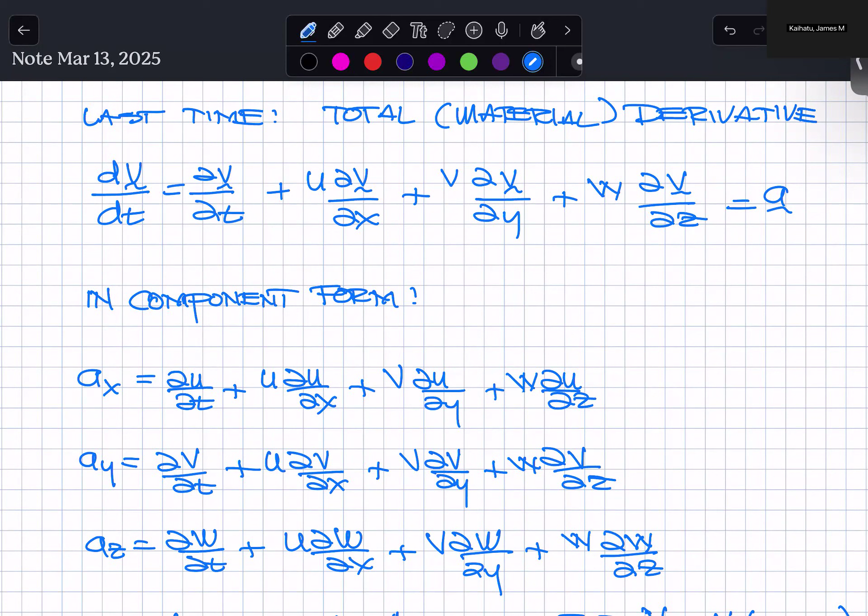Anyway, so what we did last time was look at material derivatives, looking at the change of velocity as a function of time, and if that velocity was also a function of space. So this is the general way that we did it, and then we wrote it out into component forms for the component.

Let's see - x is this way, I guess. Yeah, right, x, y, and then z upward. And then also that would have the components u, v, and w for the velocities lying along those axes. So this would be the component form for the acceleration of a velocity field that was a function of space and time, and it takes into account the translation between those.

So let's take a look at an example and see how we can actually evaluate this and what it actually means for us.

Okay, so let's say we had a hose with a nozzle on it, and fluid is flowing through this hose at 5 feet per second - that's upstream of the nozzle. The nozzle has a length of 2 inches, and downstream of the nozzle, the fluid flies out at 40 feet per second.

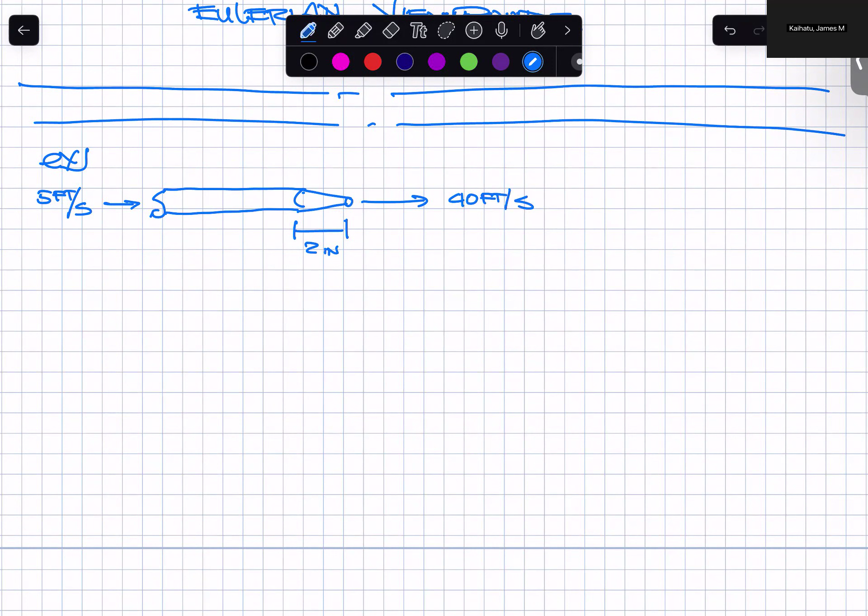Okay, but this is steady flow - steady in the sense that the 5 feet per second has been going into the upstream side of this hose for time immemorial, we don't even know. And 40 feet per second of fluid flow has been jetting out of the outflow of the nozzle along the same time. So there has been no change in time. So what is the acceleration?

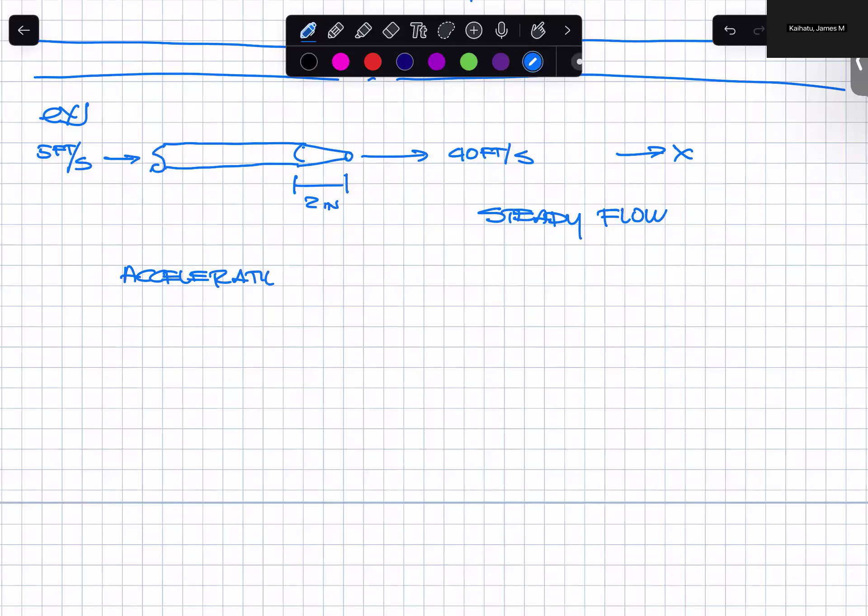Let's say we'll just assume that the only thing that really is evident here is flow in the x direction. So our x component of acceleration looks like du/dt plus u du/dx plus v du/dy plus w du/dz.

Okay, so we want to be able to evaluate that. Well, first of all, it's steady flow, so this term is going to go away. Let me write that a little bit neater. There's no flow in the y or z direction - no flow up and down and no flow in and out of the paper, only flow going from left to right. So those are both zero.

Now you can make the argument, and the argument has been made, that because the nozzle is getting smaller, there has to be some kind of flow going in the vertical direction or in and out of the paper direction. We'll just assume that that's small or negligible. So all we have left is this, right? Now, which velocity do we take?

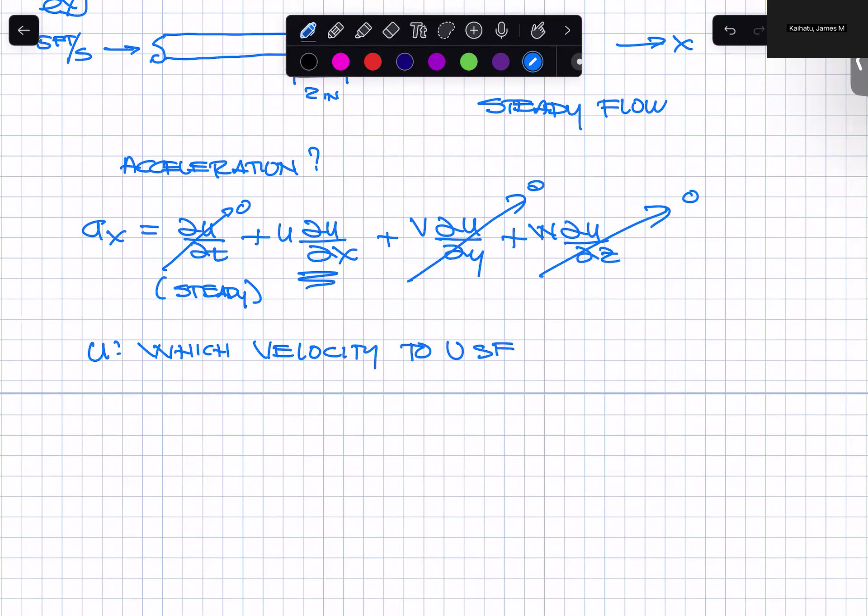Which velocity do we use? We've got two of them here: 5 feet per second and 40 feet per second. So which of these are we going to be able to use here?

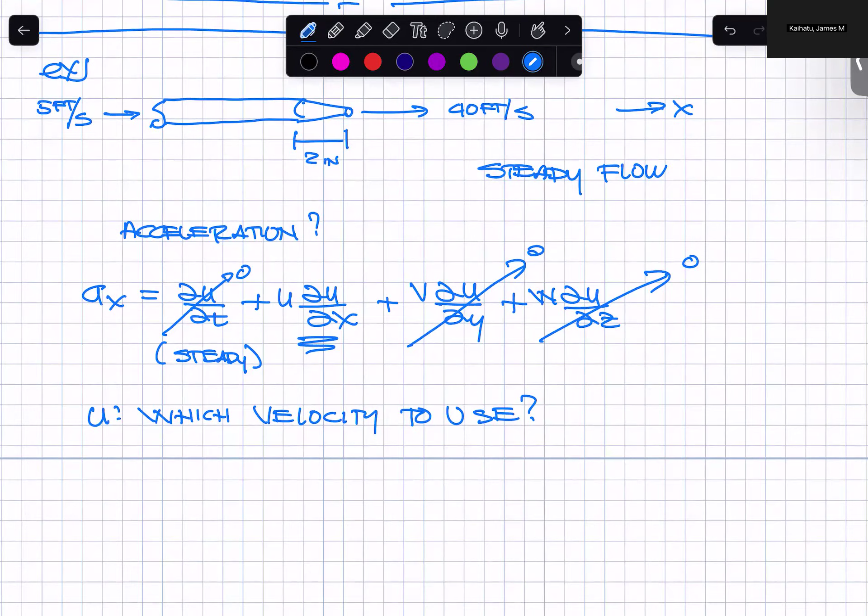Well, what we do is we use an average. So 5 feet per second plus 40 feet per second divided by 2 is equal to 22.5 feet per second. You'll see this used commonly. If you've got two very distinct velocities and you don't know which velocity to use, you might just use an average of the two.

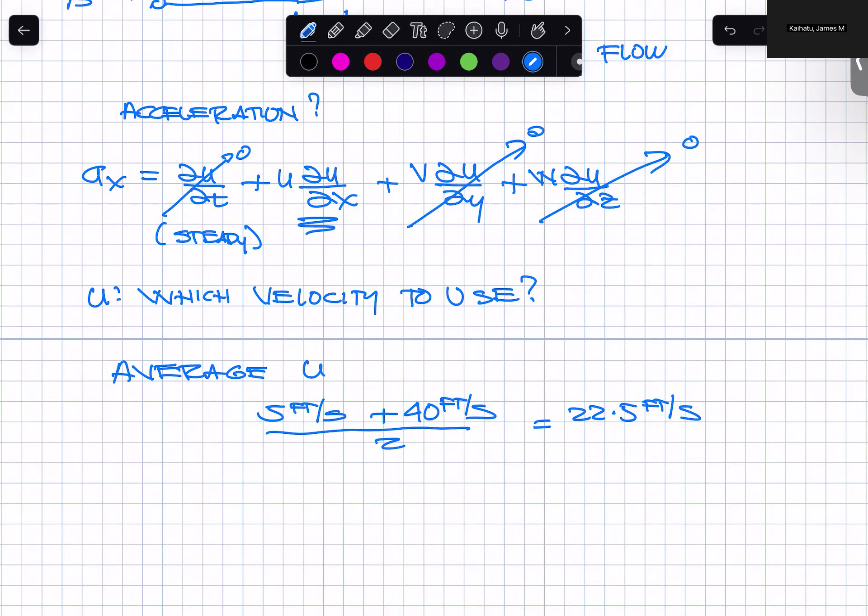And so to calculate this du/dx, we essentially just have the difference in velocities over the distance, dx. The distance here is 2 inches divided by 12 inches per foot, right? So this ends up being 210 over seconds. That's the units.

So a sub x then is u du/dx, which is equal to 22.5 feet per second multiplied by 210 over seconds, and this equals 4,730 feet per second squared. And if you divide through by gravity being 32.2, this is basically 147 Gs.

And that's a lot of acceleration. But anyway, this is an idea of how we can actually get a non-zero value of acceleration for a steady flow case, because the velocity can change as a function of space. And what's forcing that is this nozzle constricting the flow.

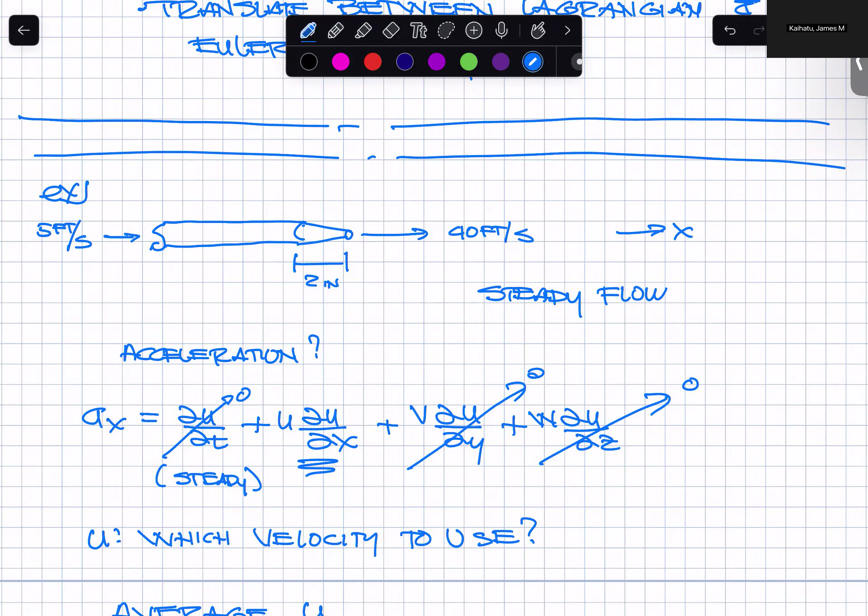Okay, we're going to change gears a little bit here. I'm going to move away from discussions about the Eulerian versus Lagrangian for the moment. In order for us to continue, our goal here is to come up with a way of describing the equations of motion as we know them, F equals ma, Newton's second law, all that kind of stuff, in a format that is useful for fluids.

Again, those laws have been established for particles. Now we need to establish them for fluids using an Eulerian point of view, and so we need to make some changes to what those equations look like.

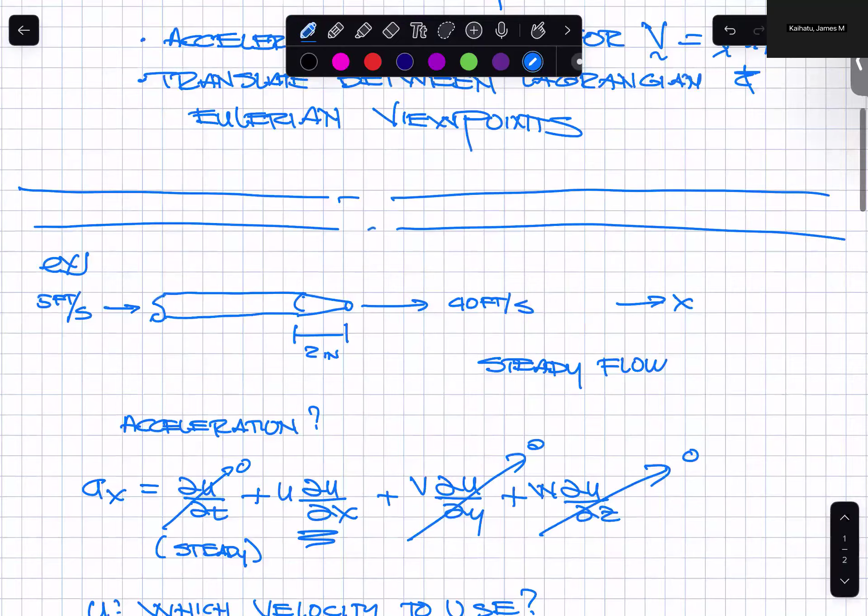So one way of changing those equations is via this convective acceleration. Another way is by translating between control volumes and systems. And so what we have to do here is offer something of a way of translating from a system to a control volume. But first, what we have to do is define all of that.

And I apologize for my voice. The cold seems to have abated, but it's left behind this. My voice kind of sounds like I'm gargling nails, so I apologize for that.

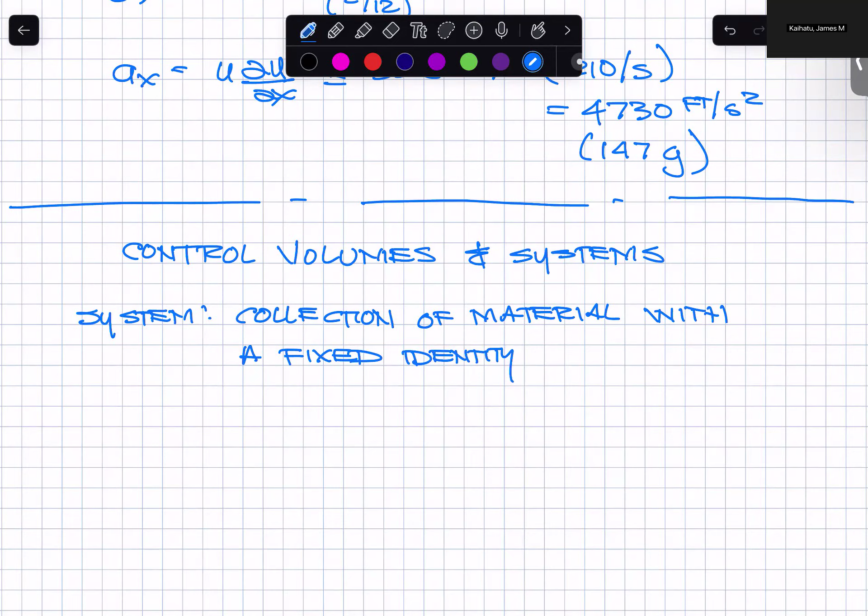So, control volumes and systems. Okay, so a system, by definition, is a collection of material with a fixed identity. Now, with the system, you can apply the laws of physics to a system.

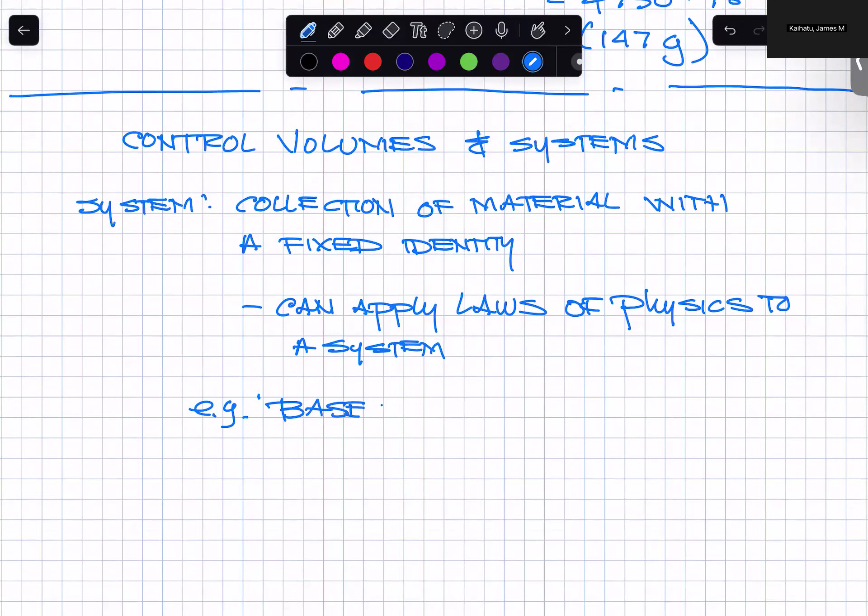So, as an example, we'll talk about my favorite pastime, baseball. Baseball is a really good example of a system, right? It is a collection of material that has a fixed identity. We identify that, despite my sloppy drawing, as a baseball, right? And we know that the baseball has not only a fixed collection of material, it has a boundary. We know what is baseball versus what is not baseball by looking at this. Anything outside that circle is not a baseball. Anything within it is a baseball. All that material has an identified fixed identity.

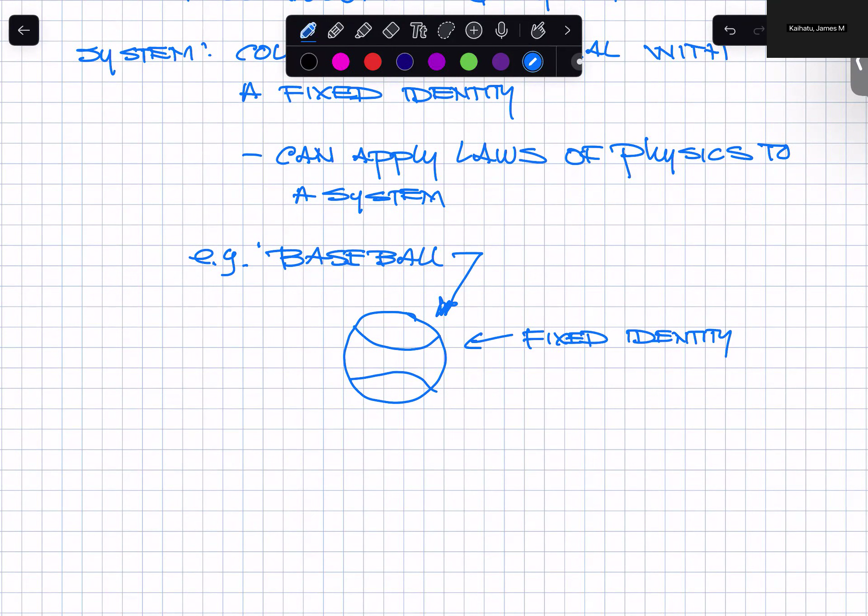So, in this sense, we can apply the laws of physics to a baseball. We know from our physics class what the equations of motion for a baseball flying through the air might be. We know what forces act on it, all of that kind of stuff. So, in this sense, the system - we only know it because we're able to follow the baseball around. We're able to follow systems.

Systems can be easily followed and tracked, and by virtue of that, the laws of physics can be applied to that because we know what the system is composed of. So you can follow the system around, right? Now, this is difficult for fluids.

Because if we wanted to follow a fluid in the same way that we would follow something like a baseball, we would have to look at it at a molecular level. That is, we would have to identify a molecule and follow that molecule around.

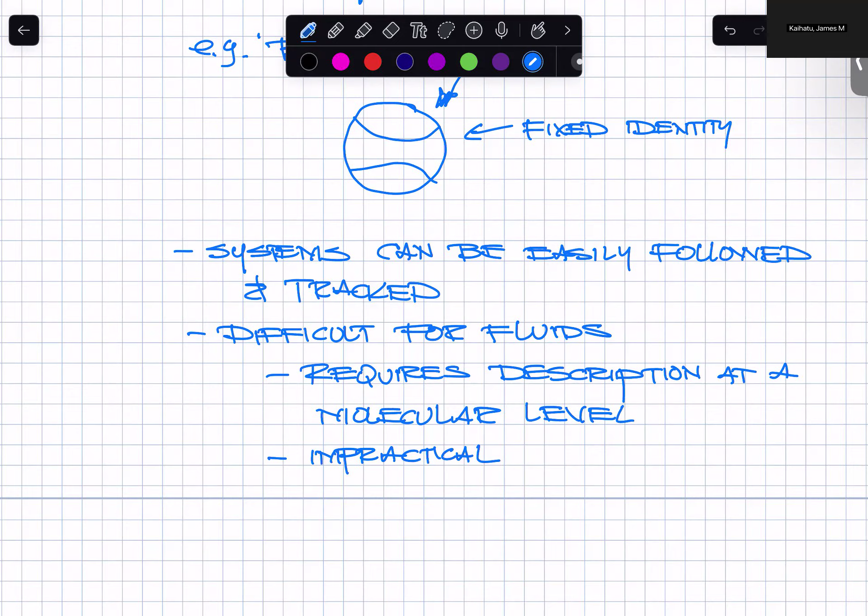So we need to find a different way of describing and manipulating our understanding of the laws of physics that apply to fluids, in a way that keeps us from having to bring it down to a system. So what we want to do is we want to shift

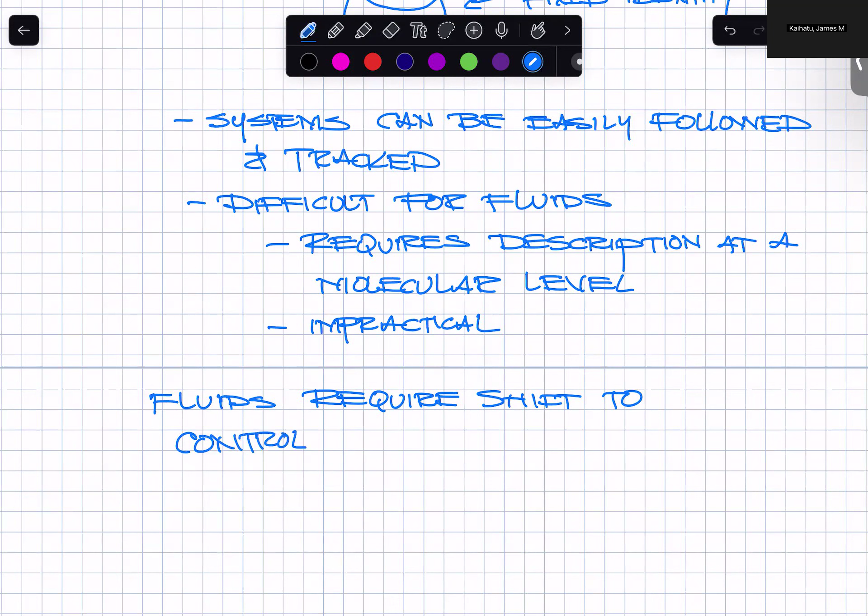to a control volume. So with a control volume, rather than simply following a particle around, you basically have a volume in which you are looking at things going in and looking at things leaving. And then you recast the laws of physics so that it applies to that kind of situation.

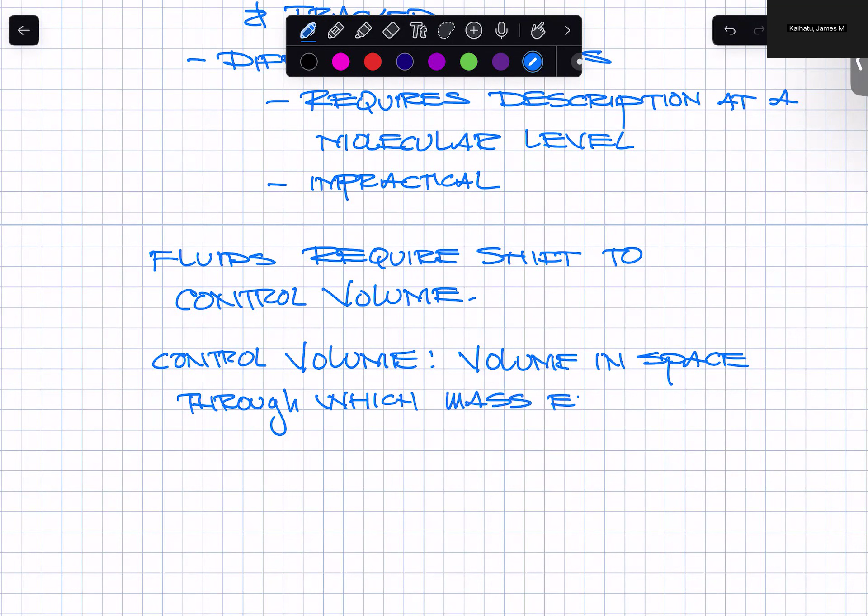So, a control volume by definition is a volume in space through which mass enters, accumulates, and exits.

This is closer to an Eulerian viewpoint. While a control volume can certainly move, if it were stationary, which is how we would typically use it, it is exactly the Eulerian viewpoint. Control volume stays put, things go in, things build up or deplete, things leave, and we just track the comings and goings of the fluid inside the control volume.

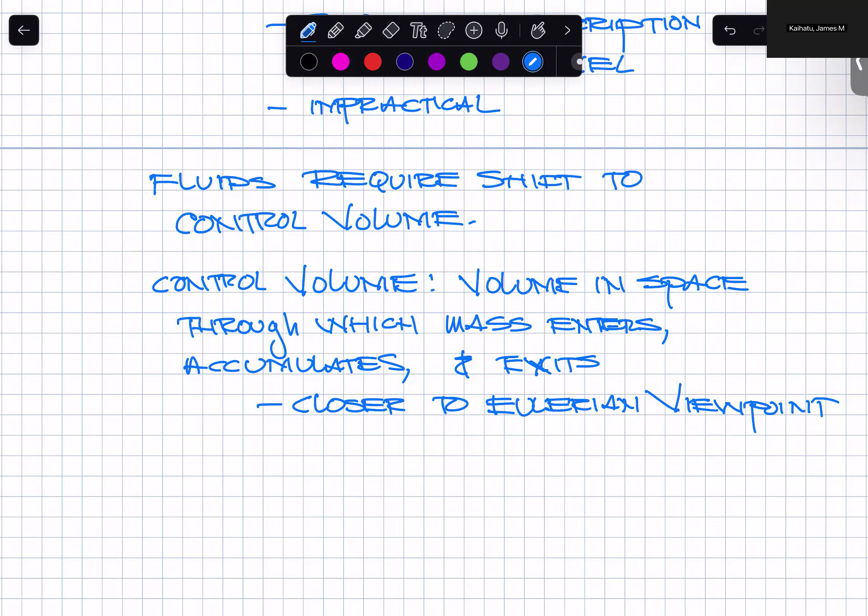But in general, control volumes can do a lot of things. It can be stationary, it can move, and it can deform. So long as you know the speed at which the control volume is moving, or the rate at which the control volume is deforming—that is, the surface of the control volume is either contracting or expanding—we're all good. We can apply everything we're learning here to those types of situations.

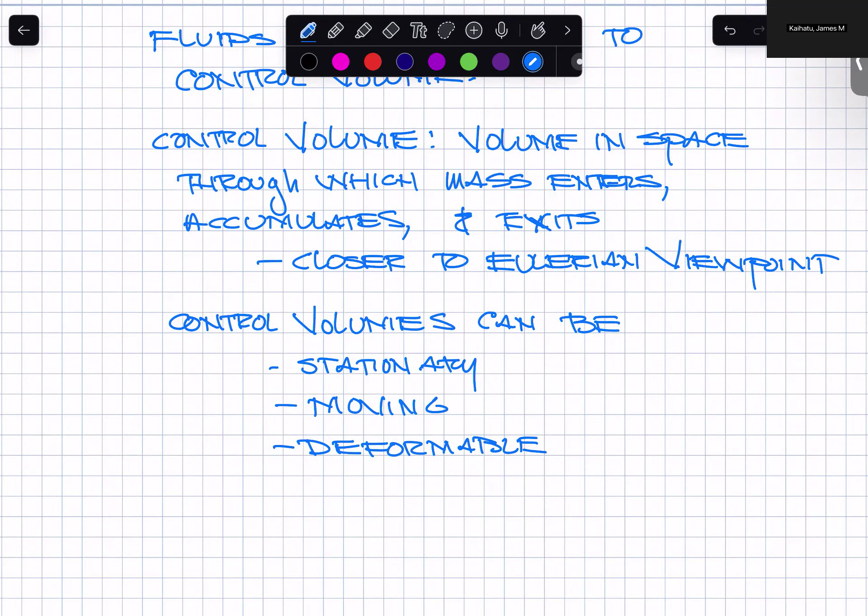So again, to state this: the physical laws that we know, they're written for systems. So we need to translate that to control volumes.

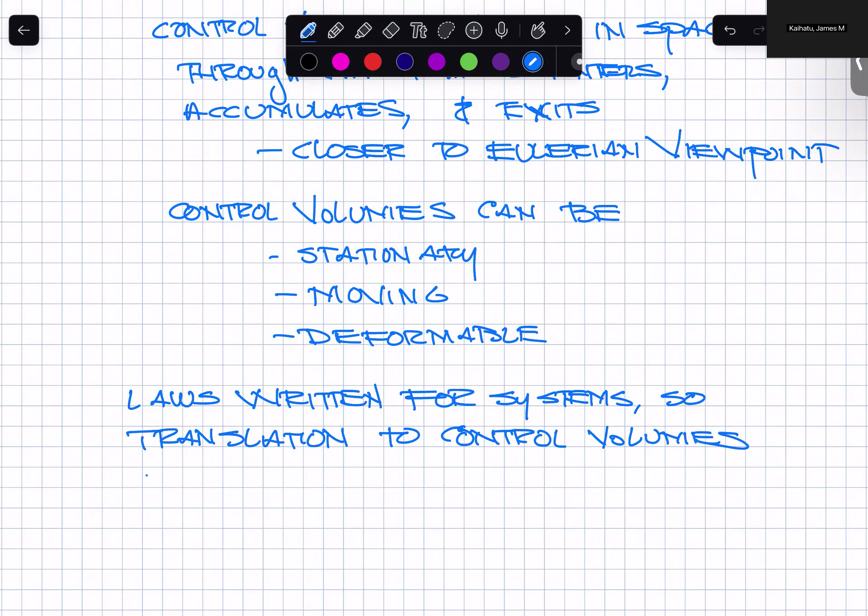And this is done via a device known as the Reynolds Transport Theorem. That's what this thing does. Eventually, at the culmination of chapter 4, we'll run into the Reynolds Transport Theorem, and then we will be able to rewrite Newton's second law, for example, to apply to fluids via the Reynolds Transport Theorem.

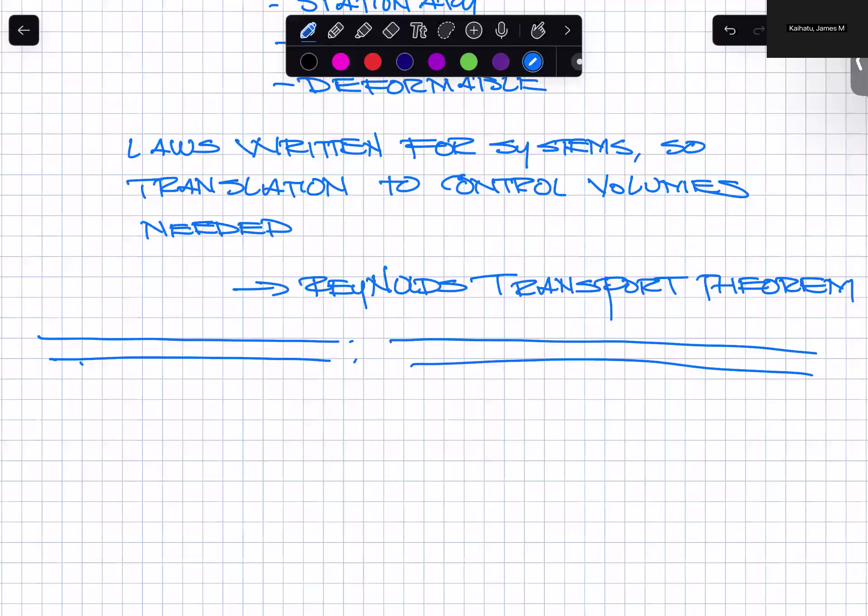So what I'm going to do here—oh yeah, let me move on to that. All right, I took advantage of my spring break prerogative by getting another cup of coffee here. So there's a slight pause.

Okay, so now that I've introduced both systems and control volumes, let's compare and contrast the two and show an example of why a control volume approach is far easier for fluids. Right, so let's say...

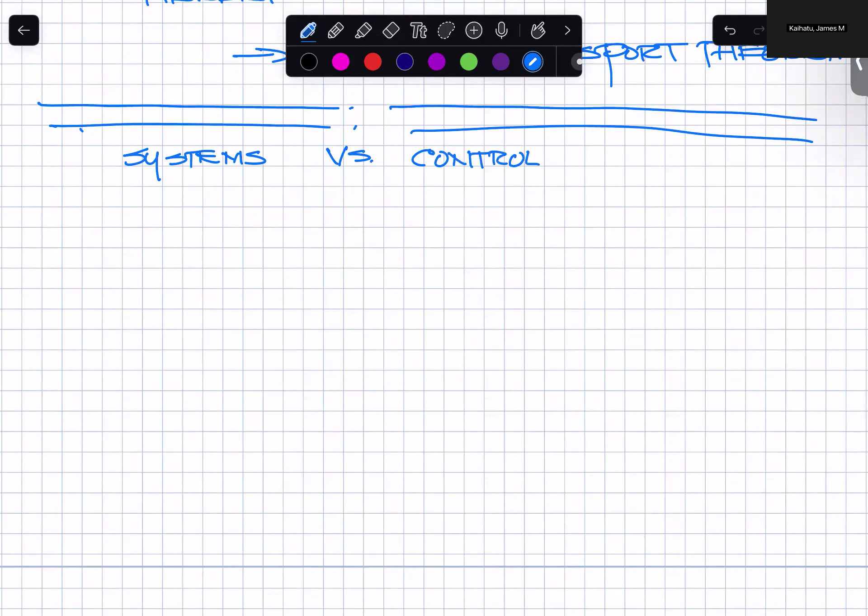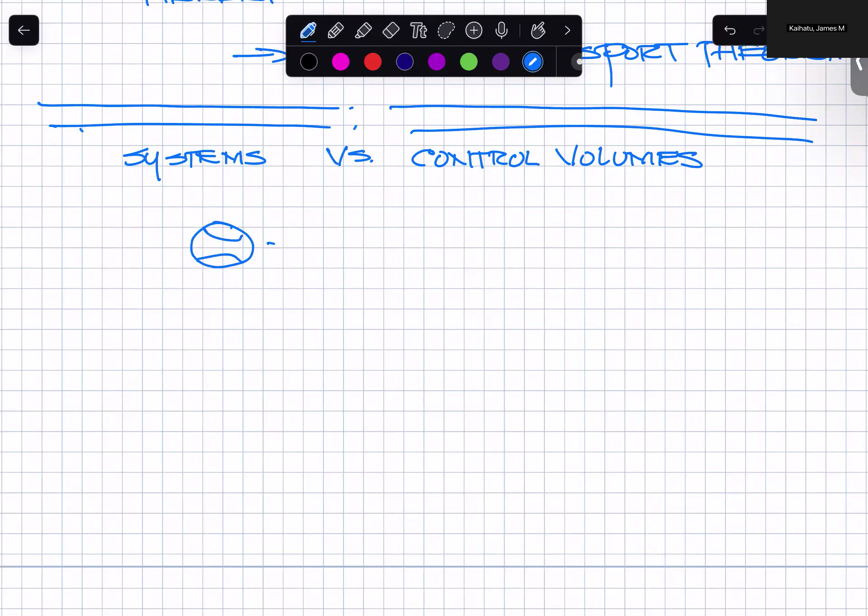Okay, so first let's take a look at a system approach, and we'll show an example here. Let's say, again, you've got a baseball and you are basically throwing it at somebody, and unfortunately that somebody didn't catch it. And so then it bounces off that somebody, and that person ends up doing something unfortunate, like collapsing, that kind of thing.

This is really well suited for our physical laws because we have a system here that has velocity, has momentum, and then when it encounters this person, it has a change of momentum, which we can describe. There's an impact. We can describe that as well. So everything's describable via our physical laws.

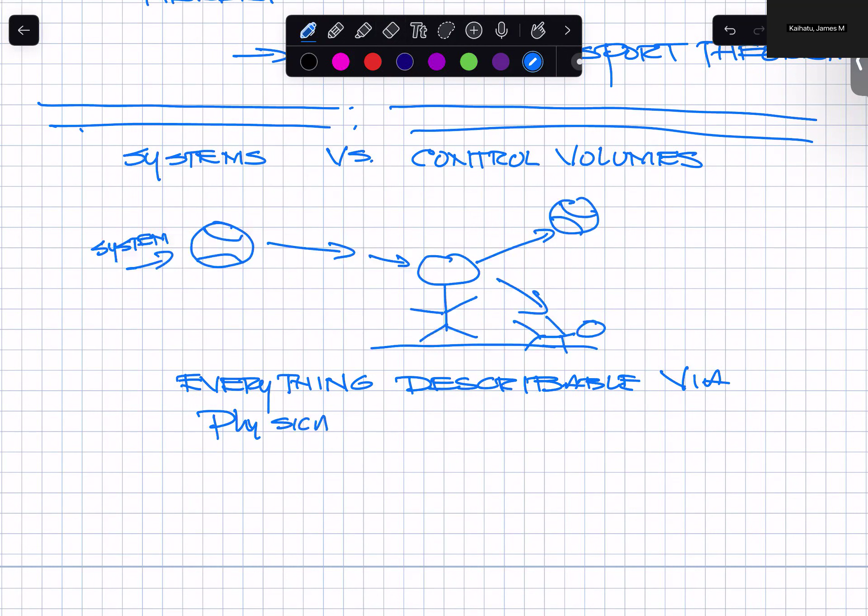And the system is always well defined. The system is the baseball. The impact is a change in momentum that happens to that system, and so on. And we can describe all of that.

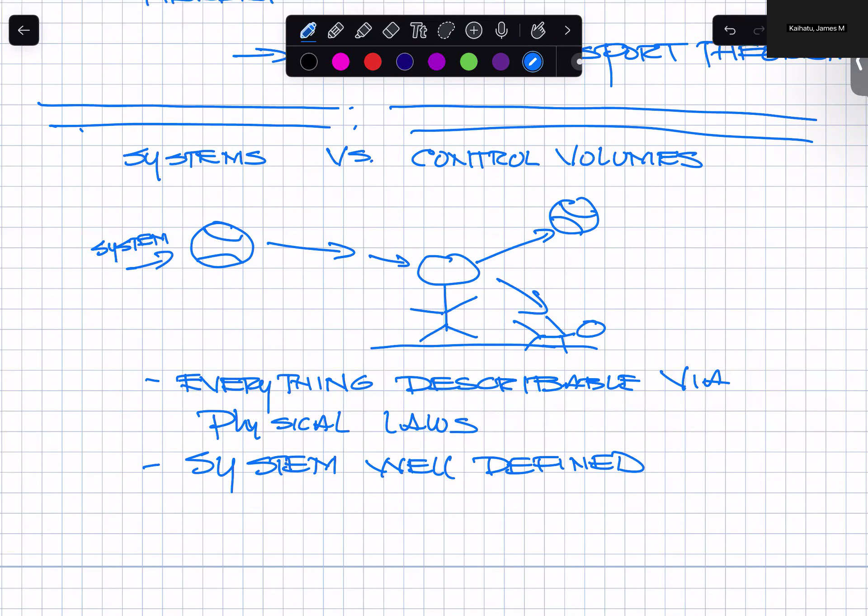Now let's take another example, which would also be a systems approach. But this time, rather than a baseball, we use a water balloon. Okay, so now we've got this water balloon—you'll have to take my word that this is a water balloon.

This is a system. It's identifiable. You create a water balloon, you tie off the knot. It is a system—an easily identifiable collection of material with a fixed identity. It has a water balloon, and it goes through space as a water balloon, deforming a little bit just due to interaction with the air, and then it finds its target.

And there is an explosion, of course, right? So the water balloon ends up exploding on this person. And there's a law that describes this impact, maybe F equals ma or something like that. But the thing that's different now is that the collective identity of the system is now dispersed, because now you've got water particles all over the place—water here, water there, water there, water there, water there. And each of these has a law associated with it.

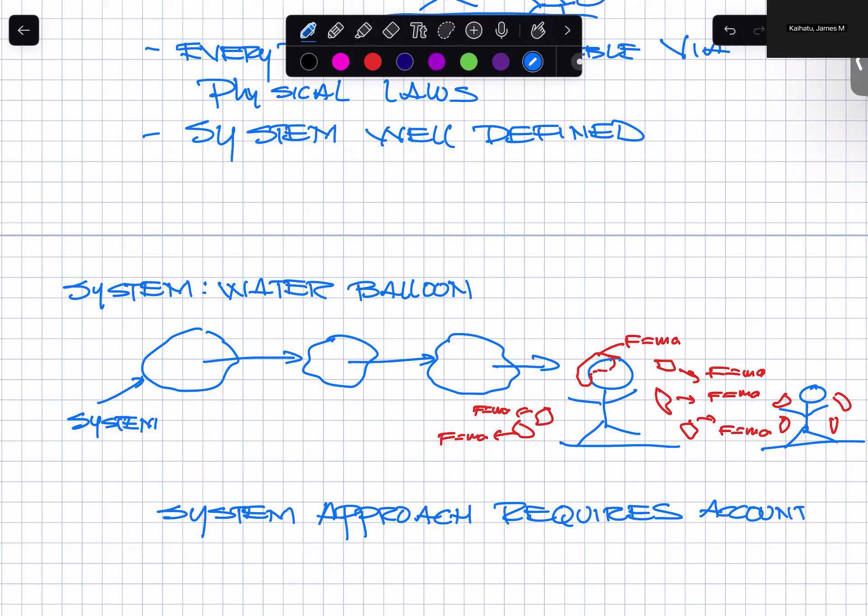So if you're missing any water, if you're not accounting for it, it's lost due to some explosion - it hits that person, it explodes, there's water all over the place. Technically, you can't get an accurate read of the force that person was hit with unless you account for every drop of water that was originally in that water balloon. So clearly, this is not a very tenable way to treat fluid flow problems, right?

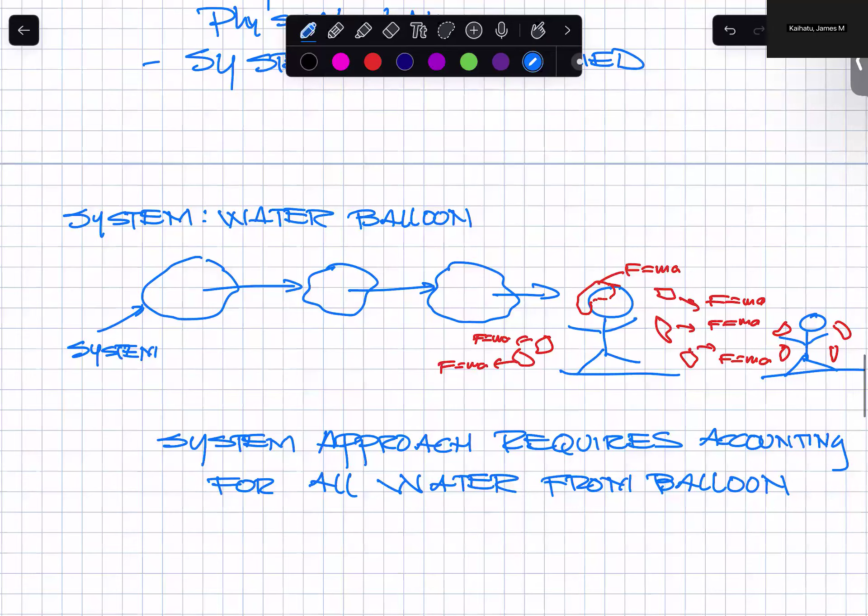So instead of doing that, we can do a control volume. Let me put a point on this. Okay, so then what we'll do instead is try a control volume approach.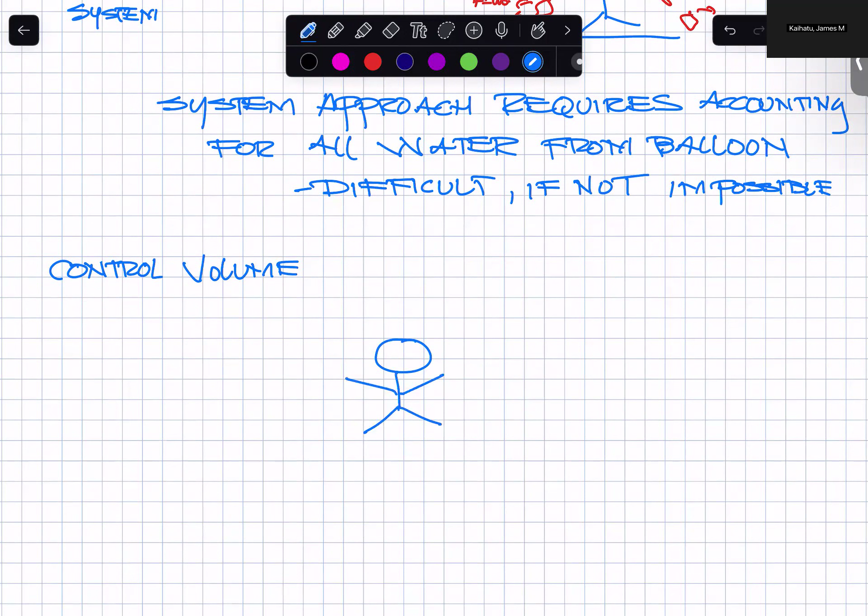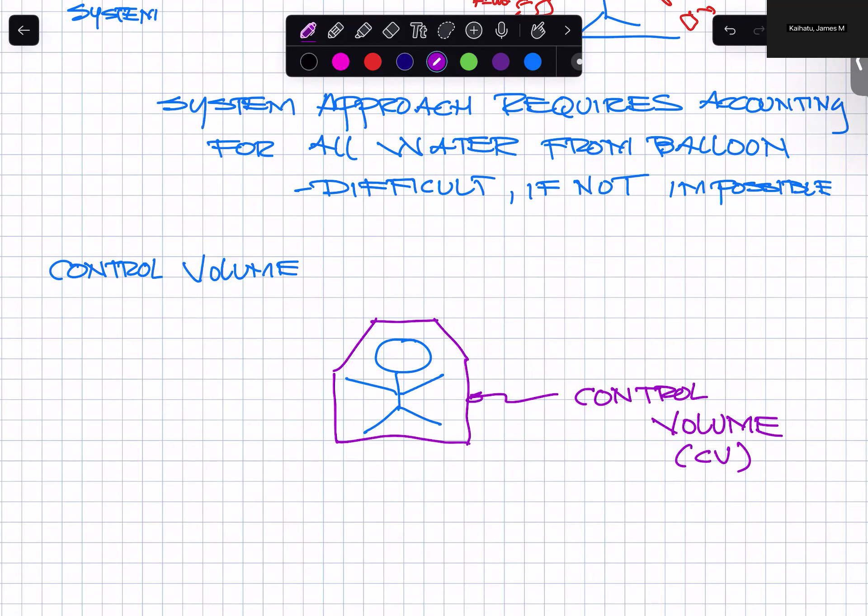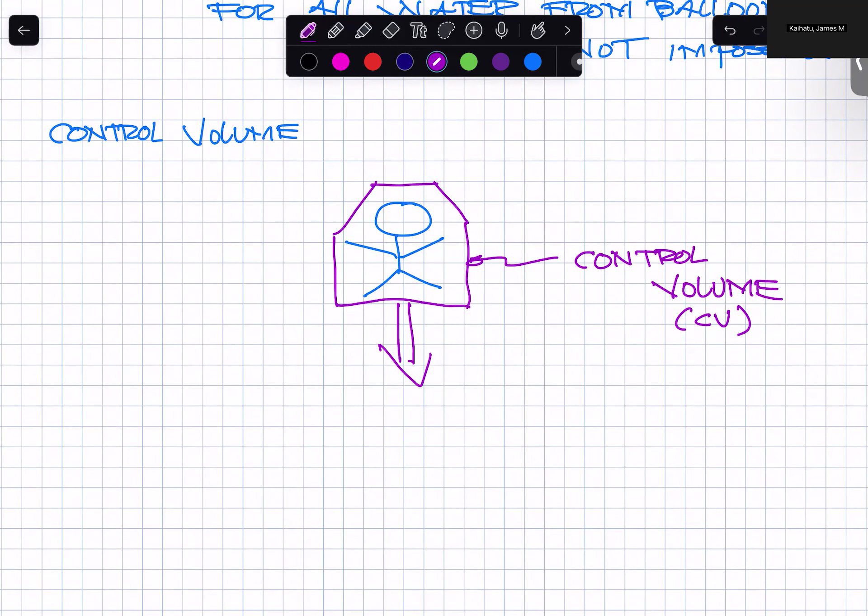So this time we'll take our unfortunate target right here and we'll enclose them with a control volume. So sometimes we shorten this to read CV. What happens then is we can remove this person and basically translate this, convert it from something where you're actually looking at every nook and cranny of your target and trying to figure out where the water went, to simply having a simplified volume in which you're just tracking what's going in, what's accumulating, and what's leaving. Something like that. So here's your control volume.

Now, when you're looking at things coming in, like the water balloon, you're only worried about things leaving and coming into this volume, or whatever. So basically, you're only tracking what's coming in, what's accumulating or depleting inside the control volume, and what's leaving the control volume.

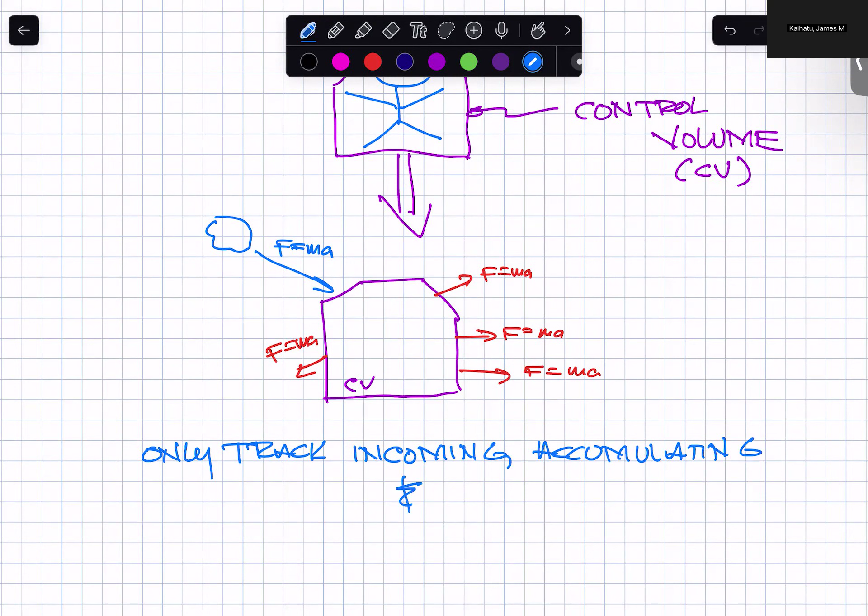And the nice thing about that is once you deal with the material that's entering through the control surface into the control volume, accumulating inside of it and then exiting it, you don't care about it anymore, right? So you don't necessarily have to worry that it might be, in this case, splashing someone else with that same water, and now that water needs to be tracked. You don't have to care about that anymore. You're only worried about what's happening through the boundaries of the control volume and inside the boundaries of the control volume.

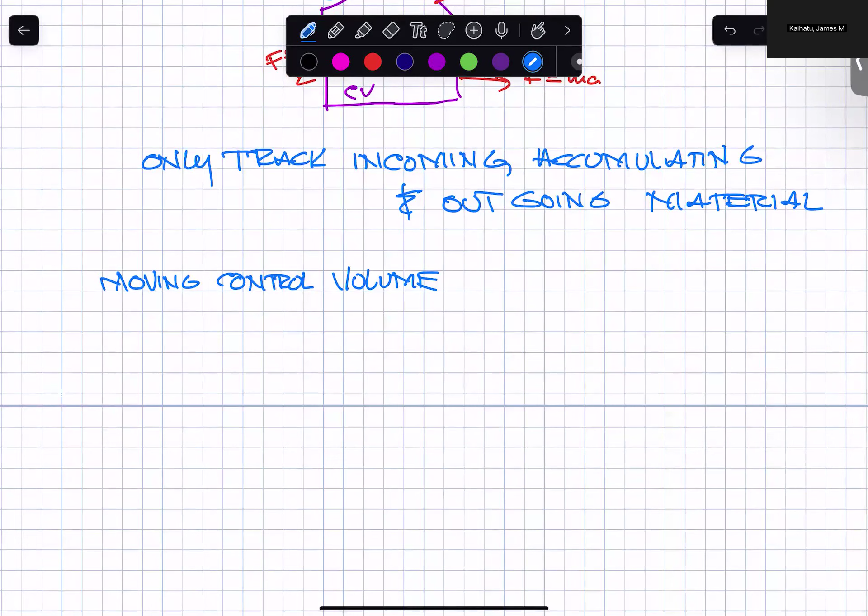Okay, so I mentioned that there's also the possibility of having a moving control volume. That is also possible. In this case, let me move this down here. So in this case, our poor unfortunate target sees what's going on and starts to run. But you can still enclose that person in a control volume.

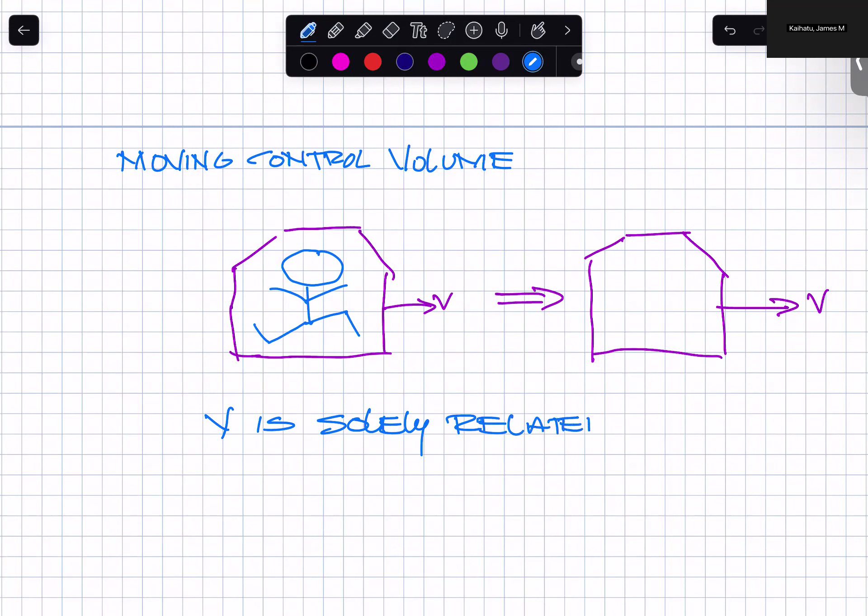This time the control volume is moving with a velocity v to track the speed of your target. So this can now be converted into something that looks like that, same control volume shape, but it's moving at a velocity v this time. Note that that velocity is not necessarily related to the velocity of the material going in or leaving the control volume. That's a separate thing - this is just the velocity solely associated with the control volume, again not related to velocity of material entering and exiting the control volume.

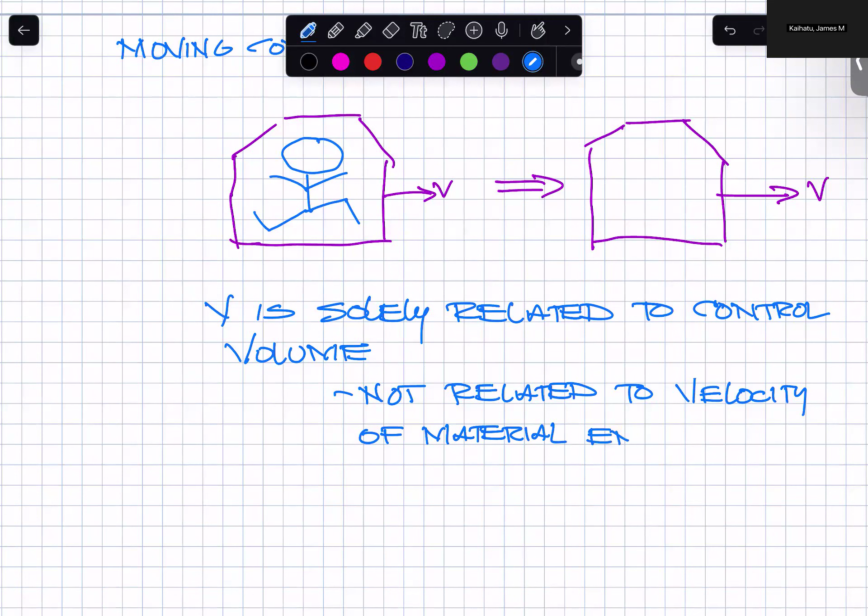So now the control volume deforms around this person who's now adopting more of a defensive posture rather than running away, right? But we still have to account for things. What do we have to account for this time? This time we need to account for the overall change in the surface area and the volume of the control volume.

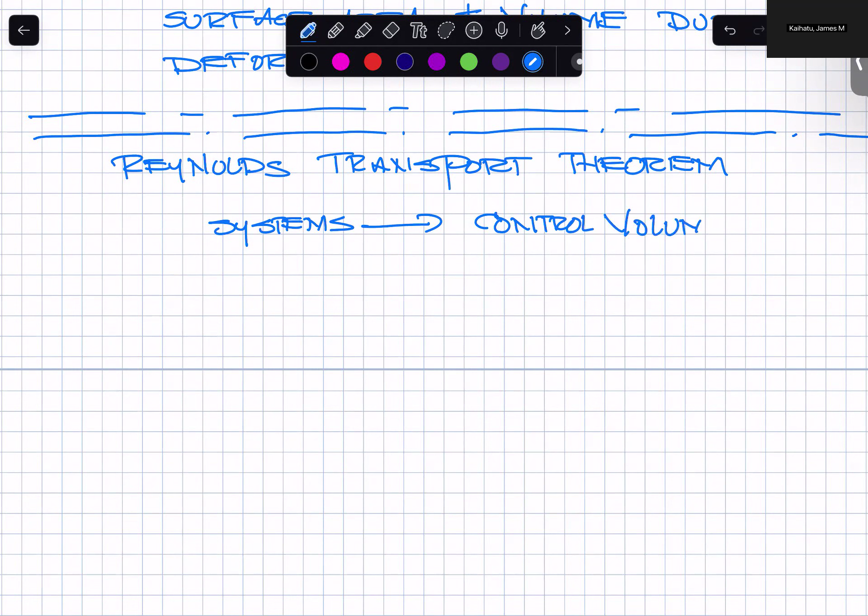Basically, it's a useful tool to translate from a systems approach to a control volume approach. So in order for us to do that, we have to define a few things.

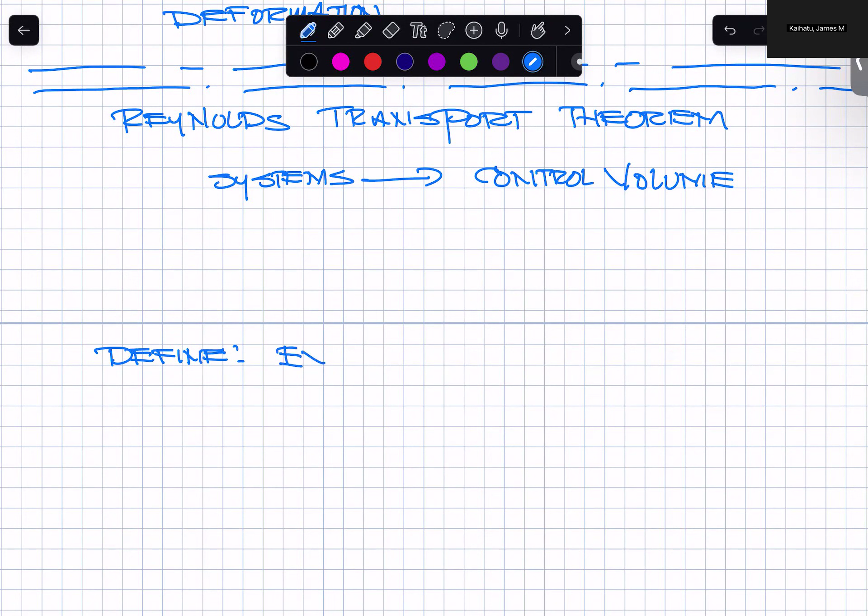We have to define the difference between an extensive property and an intensive property. So what is an extensive property? It has to do with describing the material entering and exiting the control volume, right? That is the fluid or the momentum or whatever. So an extensive property is dependent on the amount of mass.

One example is kinetic energy, because if you take a look at the expression for kinetic energy, it's essentially 1/2 mv squared. So you see m right here. So the amount of kinetic energy of something depends on its mass. Momentum is another one, because it's essentially the mass times the velocity. Weight, of course, is another - mass times the acceleration due to gravity. And also mass itself is dependent on mass, etc. So these are extensive properties.

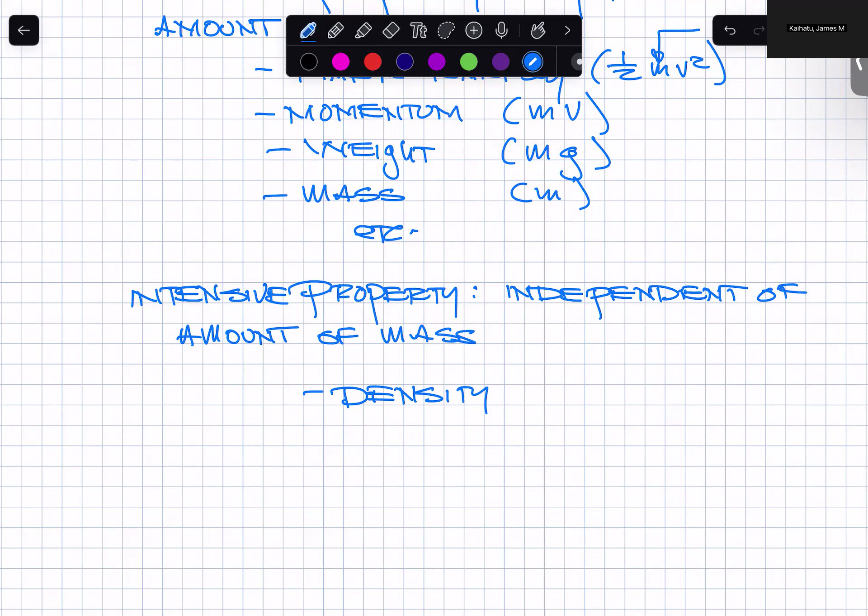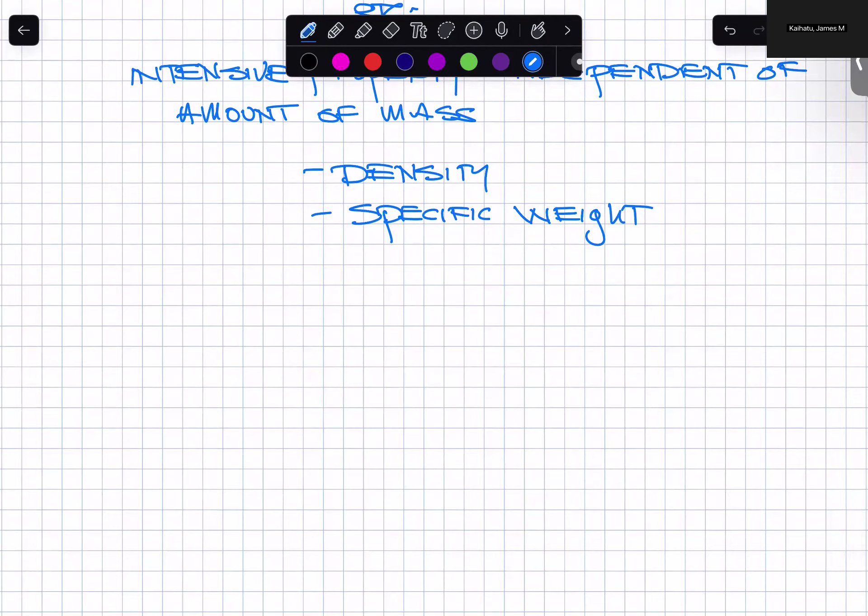Intensive properties, on the other hand, are independent of the amount of mass. So what are some examples of that? Density is a good example, because it's mass per unit volume, right? Another one is specific weight. They're also independent of the amount of mass. So it's per something. So as an example, the idea being that if you could divide out the mass, then what's left is the intensive property.

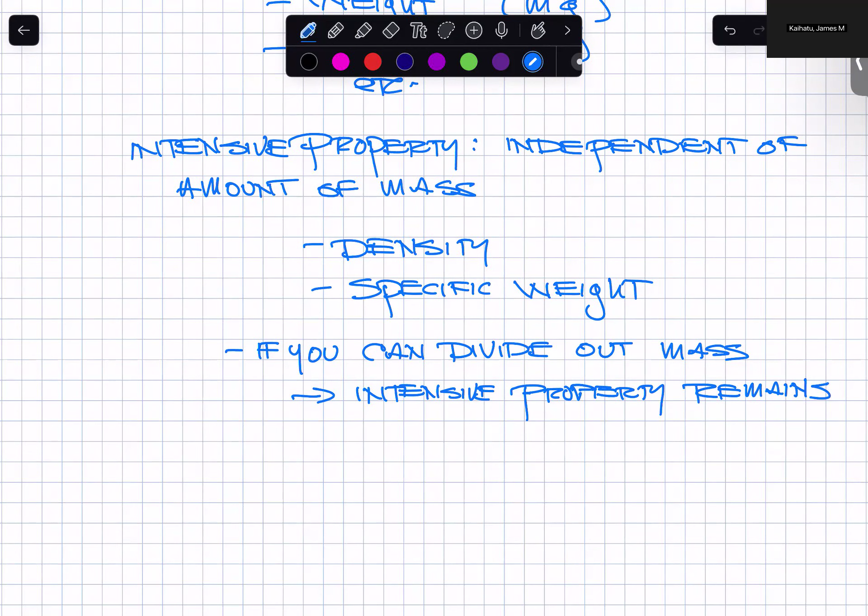Essentially, in general form, we can write something like this, where this capital B is some extensive property, and you divide out mass, and what's left is the intensive property. We'll use capital B and lowercase b to distinguish between extensive and intensive properties.

So if we wanted to take a look at the amount of extensive properties of a system, we can write it like this: something that's integrated over the system, the mass density multiplied by that intensive property multiplied by the volume, right? So density times volume is mass, and so that multiplied by the intensive property is the extensive property. And this is then integrated over a system.

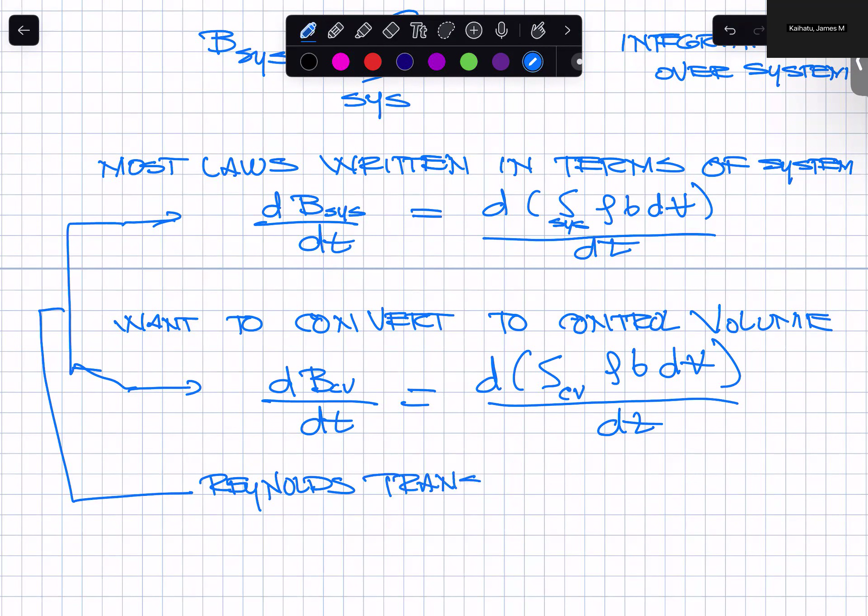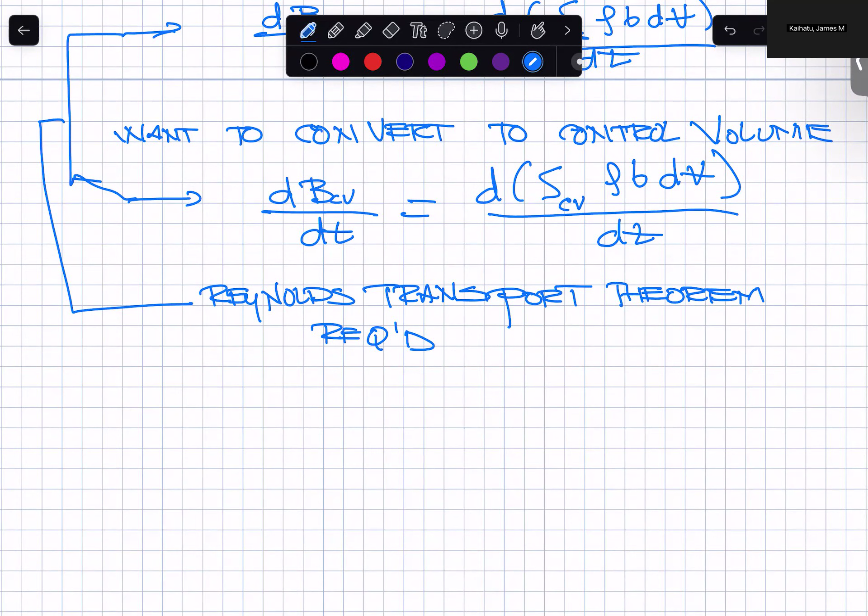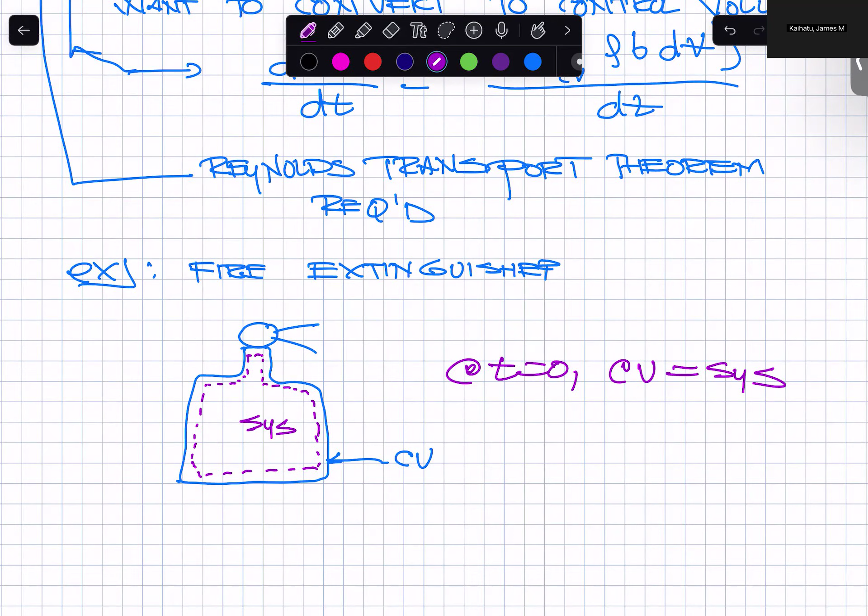Nothing's happening, right? So now at this point, it's time to fight the fire, and now you open the valve. Now you still have a certain amount of system inside the control volume, but now all this stuff is coming out, and all this can be also comprising the system. So that's your system - this is also part of the system - but the control volume is still the same. So the thing is that within the context of the system, the mass of the system is unchanged. Whether you are keeping that foam within the original bottle or tank, or opening the valve to put out the fire, the amount of system, which is the mass of the system, the mass of the foam, remains unchanged.

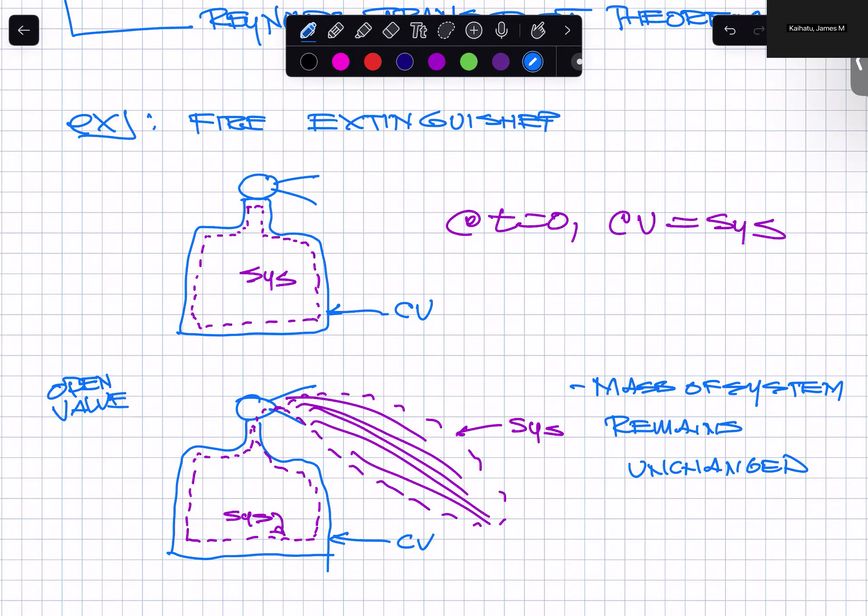So the mass of the system remains unchanged because as long as we're able to track where the foam goes, we can account for it all. Thing is, though, now we no longer have this equivalence between what's going on in the system and what's going on in the control volume, because now the mass inside the control volume is reduced. That changes.

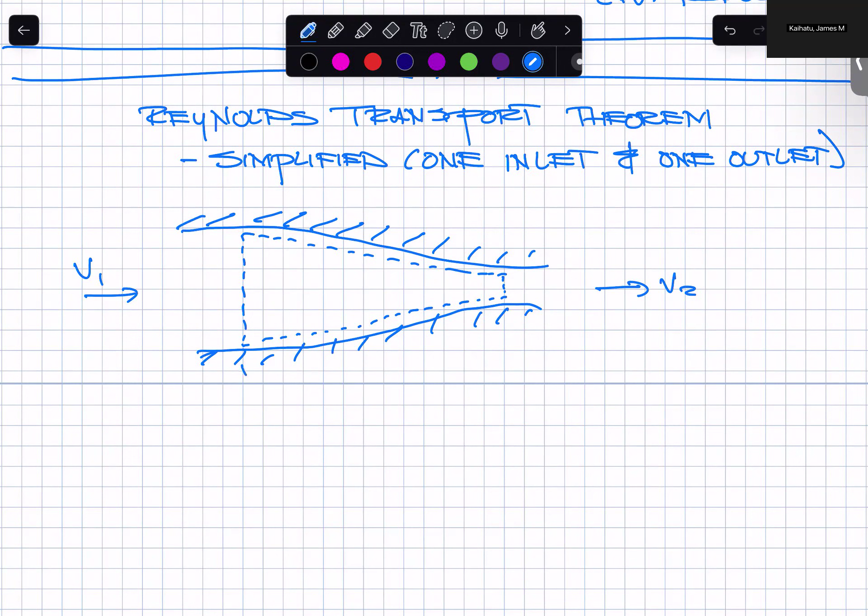So fluid has been flowing through this cavity for forever, coming out through here at V2 and going in here at V1, and there's this boundary here. The inflow we'll call 1 and the outflow we'll call 2. And this we'll call time t.

Some arbitrary time. This is a situation. Now the control volume is the pipe or the domain between 1 and 2. We'll call this a pipe. So it's a pipe between...

Remember that a control volume is stationary and we're only looking at things going in and out. So it makes sense for the control volume here to be the pipe, the thing that contains whatever we're looking at. And what we're looking at is the system. The system, on the other hand, is the fluid that occupies the control volume at time t. So the control volume is in the solid line and the system is in the dashed line.

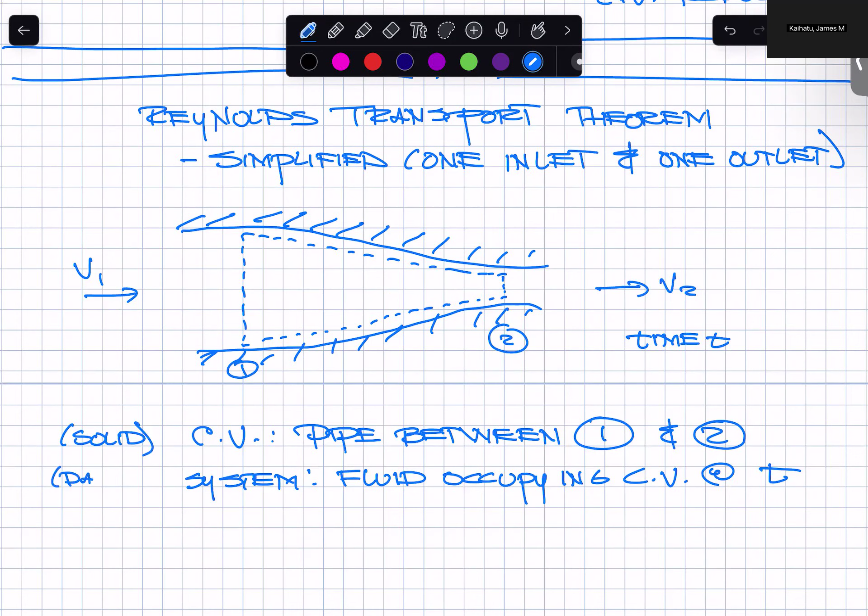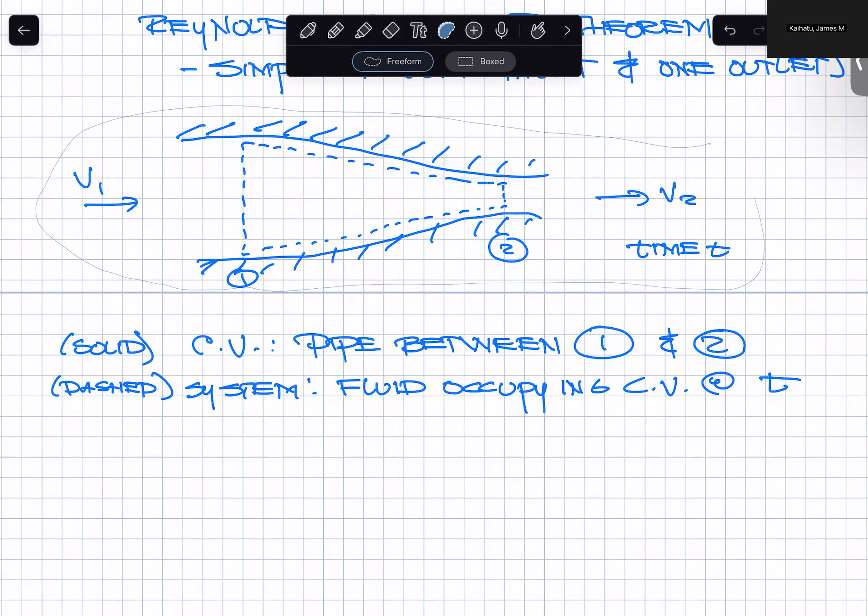Okay, now I'm going to do something a little bit mean. I'm going to take this, go ahead and copy this, and move it down over here.

Okay, so now we're looking at a situation where at time t plus delta t, there's been some change in time. We've moved forward. The control volume stays the same, but the system has moved. The fluid moves. So in this case, what is the system now? The system is still the same collection of material that was there at time t. It's just that now that whole system of material has moved from left to right.

So I'm going to draw in purple what the system now looks like at time t plus delta t. Let me do this first, a blue, and then a purple.

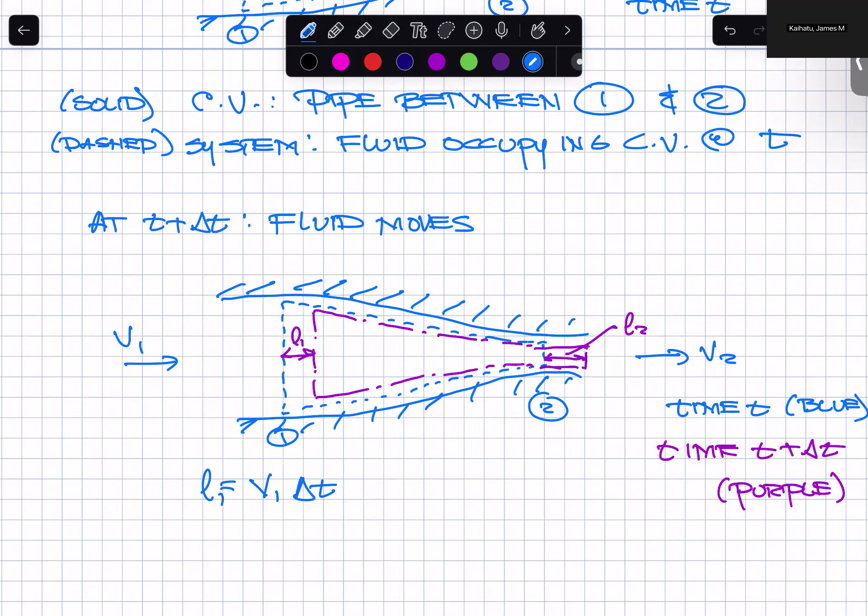So L1, the distance, is equal to the velocity V1 multiplied by delta t. It is the distance is the velocity multiplied by the increment of time. So that distance here, L1, is equal to V1 times delta t. And conversely, L2 is equal to V2 times delta t.

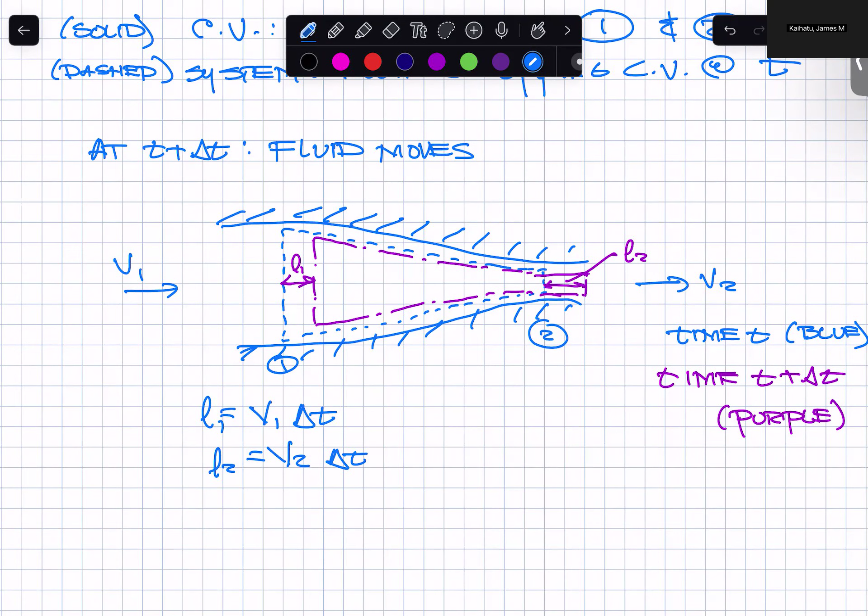So what we're going to do is take this, the collection of dashed lines, and get it out of the pipe for now. So there would be the system at t, and then we'll go ahead and draw the system at t plus delta t.

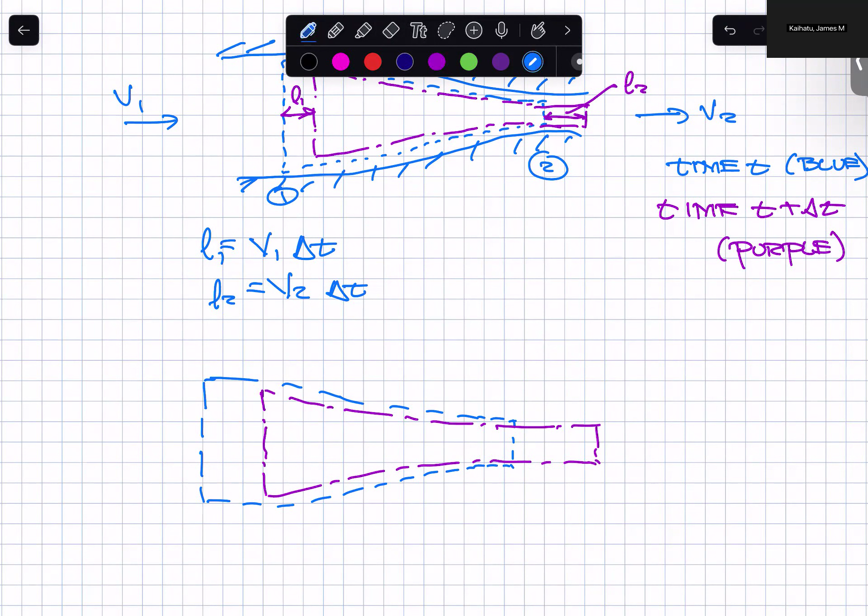So that's kind of what we've got. We've got this distance of L1, and we've got this distance L2. So this is originally point 1, and that's originally point 2, denoting the upstream and downstream ends of the control volume. Those stay the same. So what we've got is a couple of three different regions that we can identify.

We'll call this region here 1. We'll call this region here 2. And we'll call the region that remains the control volume minus 1. That is the region that was originally the control volume. Then over the course of delta t, it lost region 1.

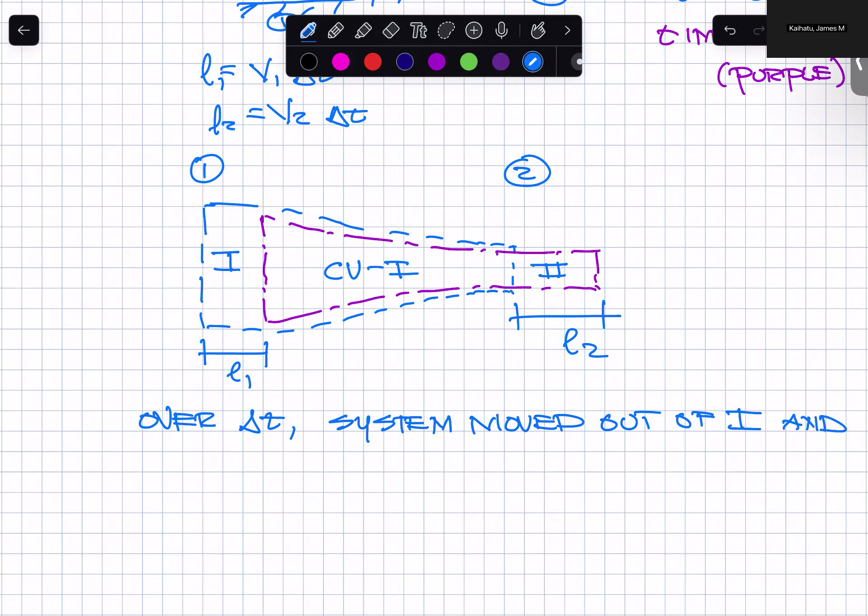Over delta t, the system moved out of 1 and into 2. So at t, the system is equal to the control volume. At t plus delta t, the system is equal to the control volume minus region 1 and plus region 2. That's the stuff that's in purple.

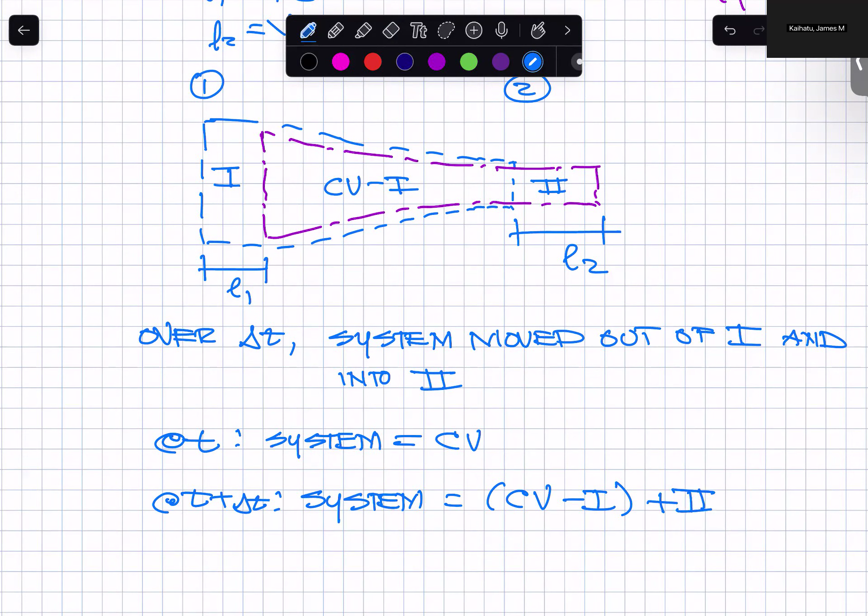So what we want to do here is track the extensive property, capital B, of the system.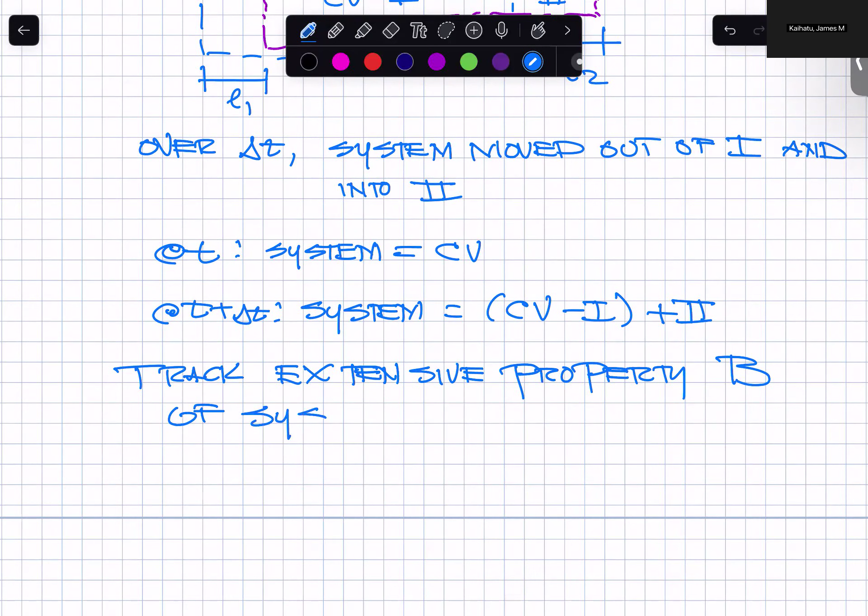So doing that, it means that B, the property, B of the system, the amount of B in the system, is equal to the amount of B in the control volume at time T. And at T plus delta T, it changes: the amount of B in the system at T plus delta T is equal to B of the control volume at T plus delta T, minus the amount of B in region 1 at T plus delta T, plus the amount of B in region 2 at T plus delta T.

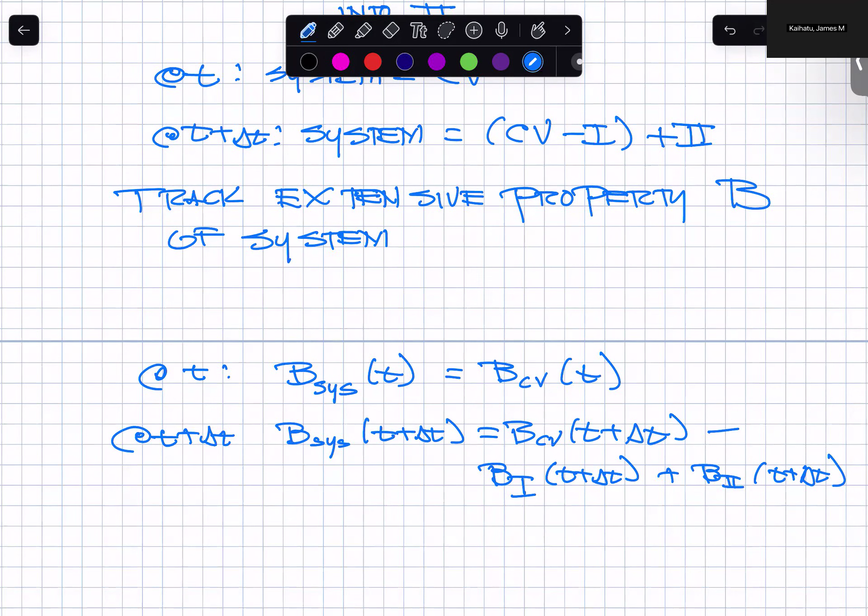And so what we want to do is take a look at the change in the system, of the B of the system over time.

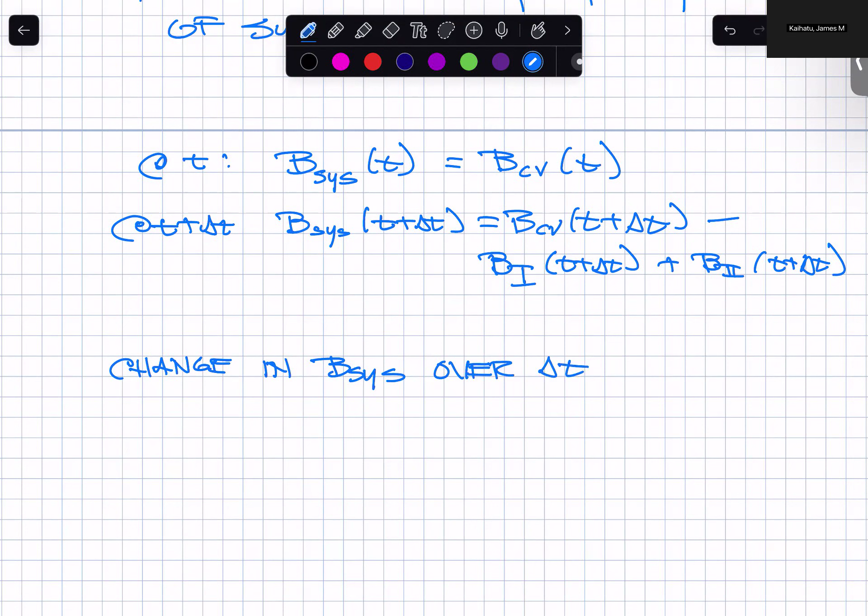So that would be delta B system over delta T, which is going to be equal to B of the system at T plus delta T, minus B of the system at T, divided by delta T. Which equals, substituting in what we have, B of the control volume at T plus delta T, minus B in region 1 at T plus delta T, plus B in region 2 at T plus delta T, minus B of the system at point T, over delta T.

So basically what we did is we took this and converted it to something that relates to a control volume. But also, this B system at T, remember that at point T, when nothing's happened yet, or we're just starting our observation, the system is equal to the control volume. So this is actually equal to B in the control volume at time T.

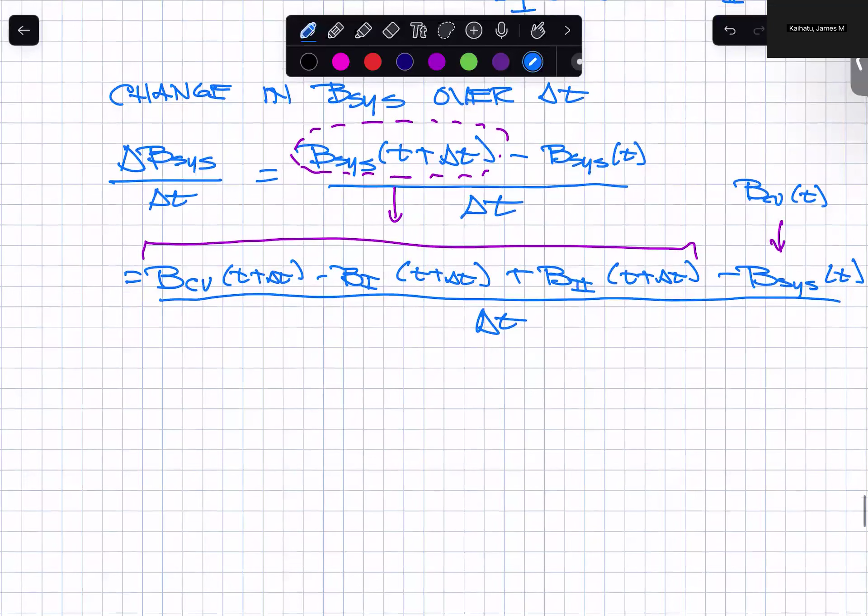Okay, so let's take all this and break it up. Delta B of the system divided by delta T is equal to B of the control volume at T plus delta T, minus B in the control volume at T, divided by delta T.

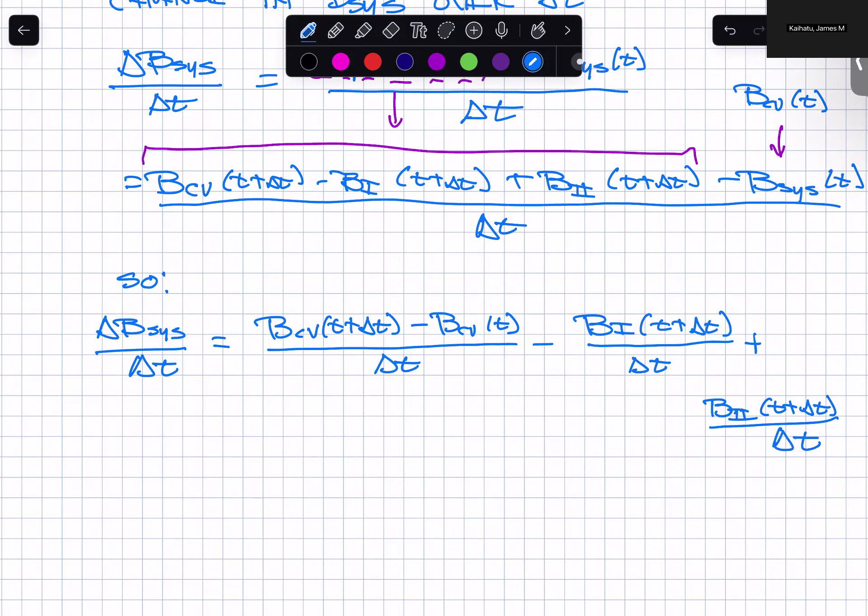Minus B in region 1 at T plus delta T, over delta T, plus B in region 2 at T plus delta T, over delta T. Okay, so we'll call this term 1, we'll call this term 2, call this term 3, call this term 4. And we'll take a look at each one of these.

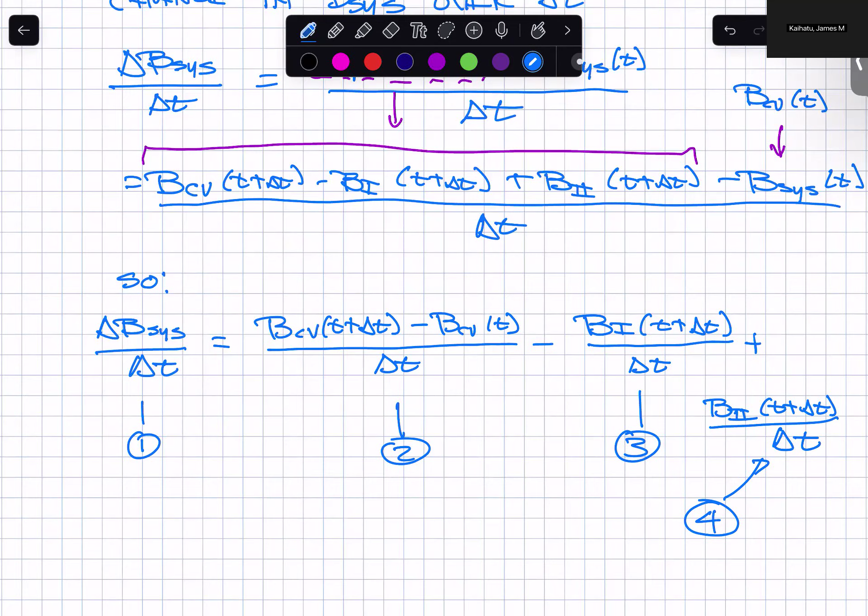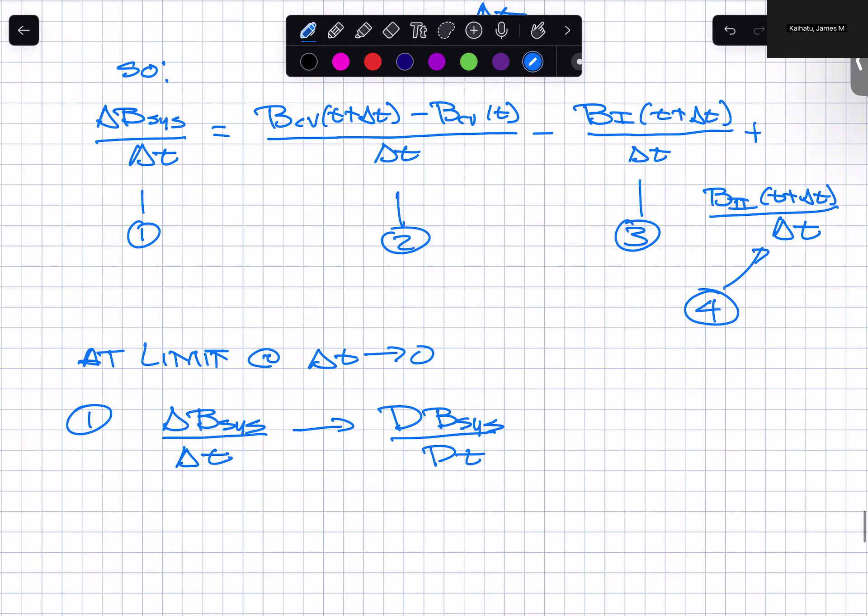Now, at the limit, as delta t approaches 0, term 1 converts from this to this. So finite differences become actual differentials as delta t goes to 0.

Term 2 goes from B over the control volume at t plus delta t, minus B over the control volume at t, divided by delta t. That's going to become dB over the control volume, dt. Or if we write it in terms of the intensive property, we end up with something that looks like this.

We recognize that B is equal to mass times small b. So the integral of density over the volume is the mass, and then the intensive property is b. So that will allow that whole thing to become capital B, the extensive property.

We've got about a minute to go, and I don't think I'm going to finish, so I'm going to stop here. Then we'll treat terms 3 and 4 in class on Thursday, which will give us the Reynolds Transport Theorem for a simplified situation. And then we'll look at a more complicated or general situation, which won't take a whole lot of time, but we'll recast the Reynolds Transport Theorem a little bit, and we'll have our quiz.